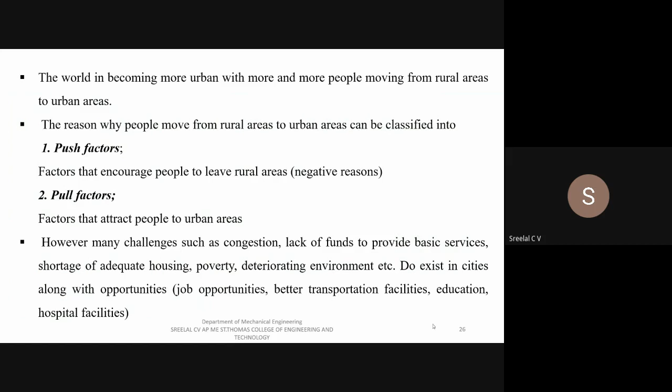The push factors are the negative reasons and the pull factors are the positive. So we were discussing in a nutshell. And after that we discussed about the factors which are influencing this particular migration. So all these points were given by you itself, except these particular 4 points, everything was from your side. So just keep in mind that it is a very important portion.

Next up we are having a discussion about the evolution of the concept of urban sustainability. That is nothing but, if there is an existing urban area, how can we change that particular area into a sustainable one? So for that we are going to discuss the basic four pillars of this concept. The first one is economic development, the second one is social development, the third one is environmental management, and the fourth one is effective urban governance.

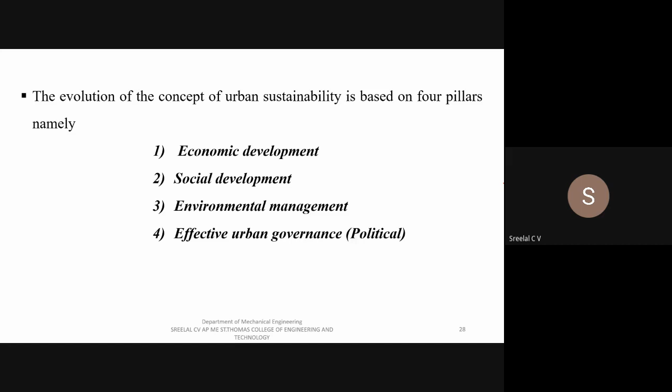So these are the factors what I told. So here you have to understand while writing, you can incorporate all these terms, like the world urban area occupies. So you have to understand that it occupies only 2% of the total land area of the earth. Only 2% of the earth's land is occupied by urban areas like cities, towns, etc. But still, 60 to 80 percentage of the global energy consumption is also taken place in this particular 2% of land itself, as well as 75 percentage of the global carbon emissions.

So why are we considering this particular sustainable urbanization? The first thing is you have to write that urban area occupies only 2% of the total area, but still 60 to 80 percentage of the global energy consumption is done by that particular 2% or the urban areas. There will be towns, so much development, so many industries and many other firms. You already know there will be so many sectors, through which 60 to 80 percentage of the energy consumption or the energy is taken to this particular 2% of the land.

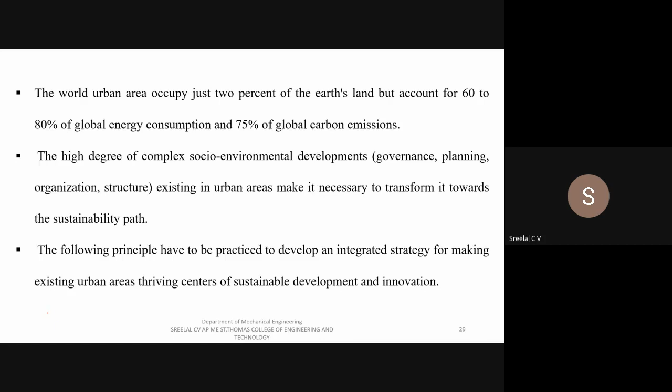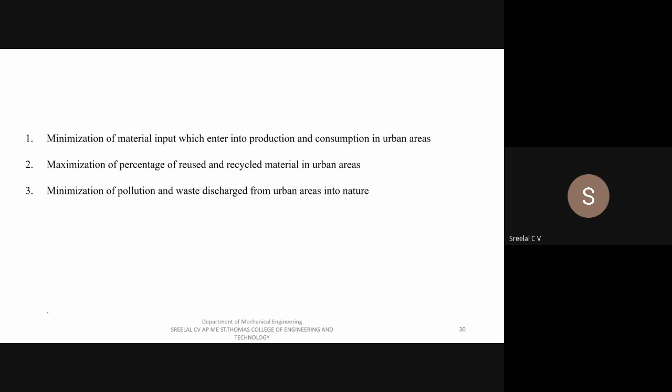I will start from here. You already took this, right? If you didn't, just give me a sign. Yes sir, done.

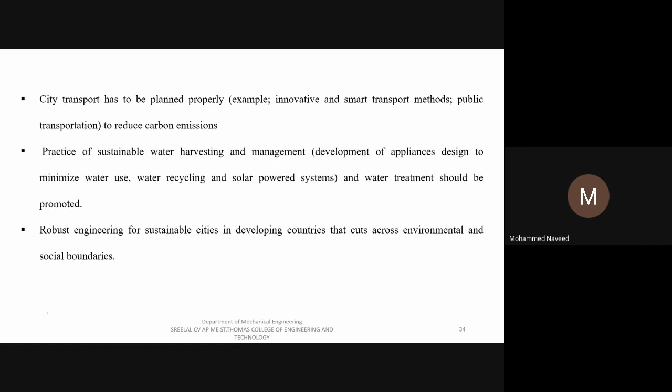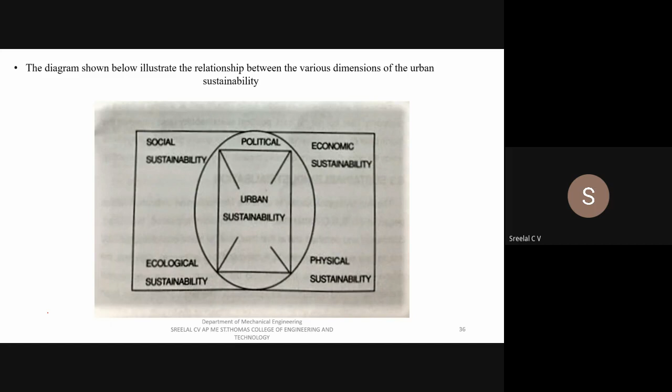Now we are going to discuss about sustainable cities. We were discussing about urbanization, and now we are going to discuss about the sustainable city. So in your words, how must a sustainable city be? Can you please tell me?

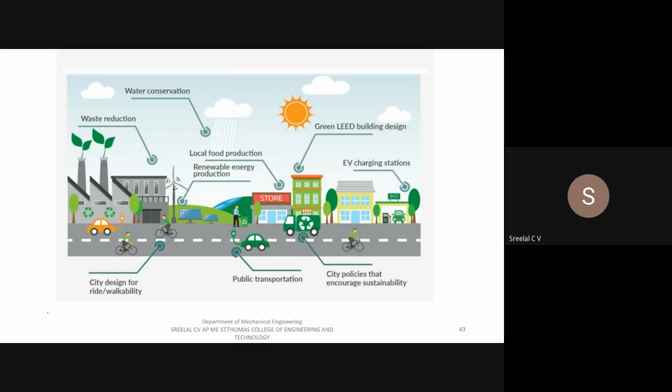So the sustainable cities work towards an environmentally, socially, and economically healthy habitat for the existing population. The main motto of a sustainable city is to provide an environmental, social, and economically healthy habitat for the existing population.

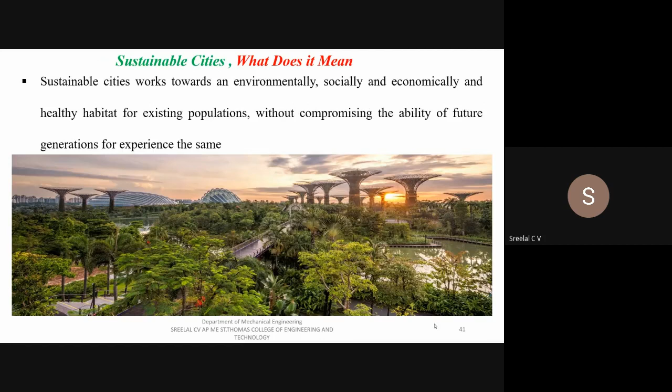So the sustainable city enables all its citizens to meet their own needs with minimal natural resources and live a good quality of life without degrading the existing natural resources or lives of other people now or in the future. So you can define sustainable city with all these definitions.

So here they are considering the citizens, or human beings, or the population, where you can fulfill your needs with minimal usage of natural resources, and have a good quality of life, but without making any impact on the natural resources or lives of other people, in the present situation as well as in the upcoming future.

As a citizen you can live a good life and your needs can be fulfilled, but with minimum natural resources use, you can have a good quality of life. But at the same time you have to consider the natural resources, that means you cannot degrade that particular natural resource for fulfilling your needs. Also you cannot have an impact on others or the life of others, in the present situation or in the future.

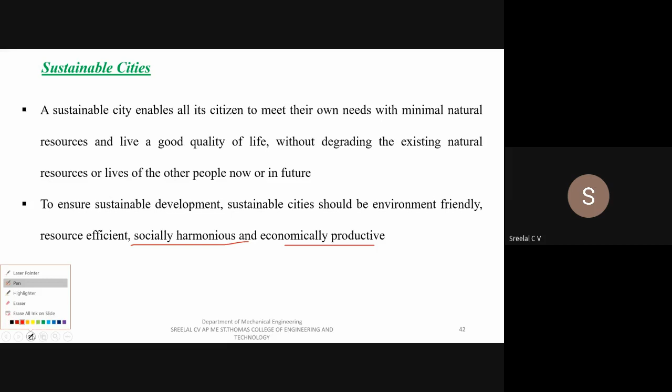To ensure sustainable development, sustainable cities should be environmentally friendly, resource efficient, socially harmonious, and economically productive. All these factors you have to add on. These points will be very familiar if you understand everything about social productivity, economic productivity, and so on. So we already discussed this.

Now we are going to discuss the basic features of a sustainable city. What are the basic features of a sustainable city? There will be 9 points. We can discuss each one.

The first point is it should be in harmony with nature. The second one is more natural open spaces - we can provide more natural open spaces.

The third one is the predominant transport mode should be walking, cycling, and green public transport. These must be the basic features of sustainable cities. You can take a screenshot of this. If done, please tell me - you should take a screenshot so all this appears in your notes. Once you get an instruction to submit your notes, you have to provide all this.

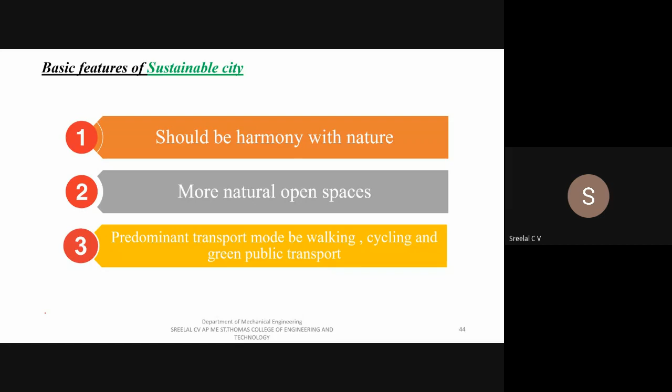The fourth point is to minimize the required input such as water, energy, and other resources. We already discussed how we have to reduce the input resources - by reusing or recycling, or in the case of energy, using renewable energy resources. So you have to minimize the input resources. In the case of water we already discussed, in energy also we already discussed - we can implement or impart solar as well as wind energy, and through that you can achieve that minimization.

And the conservation of existing water bodies, rainwater harvesting, wastewater reuse, etc. We can provide a rainwater harvesting system and wastewater reuse. When we say wastewater reuse, you have to think - if the particular water is highly polluted, we cannot give it more and more water treatment. So a less polluted water, we can use that, treat it, and use it for gardening purposes and everything.